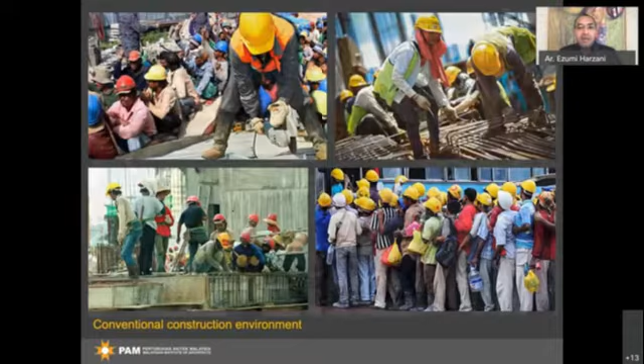This is just a comparison of how the conventional construction ecosystem works - this is what we employ in most construction projects. This analysis by McKinsey shows a comparison of 4 different projects where it's not coordinated, because with 4 different projects and different clients, everything has been done sequentially from development, design, engineering, up to supply of material, components, storage, logistics, construction time, and delivery of the building system. If you notice, there is no interrelation and coordination between different projects - everything was actually planned in silo.

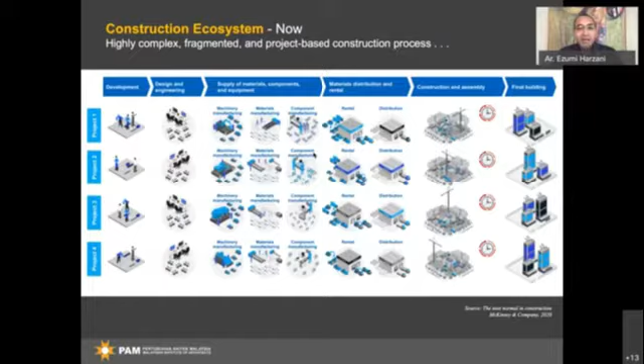But with new technology, the new construction ecosystem we expect in the near future is one where we need to use more modular systems, more standardization, and integration in terms of building components. And this is how it should be - several or many projects coordinated, especially when delivering the building components.

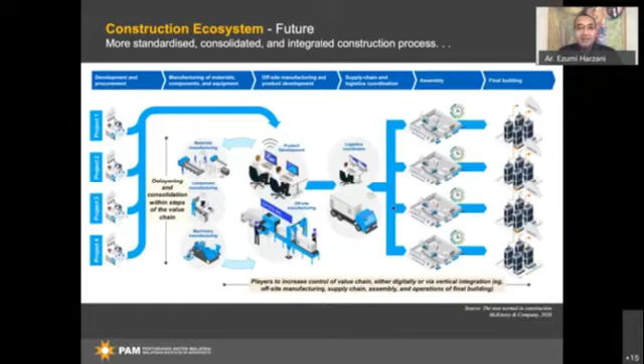Talking about modular systems and IBS systems, the design process can be done earlier. Building components can be prefabricated for various projects, which reduces the amount of activities required at site. Most of the activity will be done in a controlled environment in the factory, and then what we need is coordination for logistics and assembling the components to deliver the building. So this is in terms of construction.

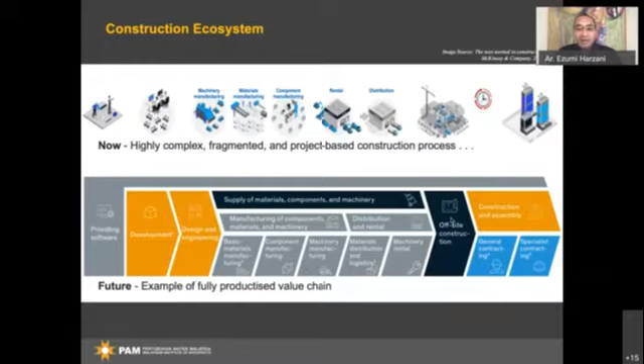The activities in the new ecosystem can be wider - not just the building component and construction at site itself, but may include providing software, system development, design development, engineering, fabrication, research on the building component, installation, coordination - until at the end, the actual construction and assembly is just a small part of the whole delivery process. So the earlier part can be done off-site, including the prefabrication program at the factory. This is the new shift already happening, but very slowly. I think this pandemic may accelerate the whole change.

Talking about construction, what about buildings and built environment? With new technology, with IBS and modular systems, Hong Kong recently completed the first project they call MIC - Modular Integrated Construction. I think that will accelerate the future construction process, so we don't need to spend 3-4 years on a construction site. China has shown some examples - hospitals can be built in just a matter of weeks. And with that, it actually accelerates the growth of construction and land development.

Talking about building and sustainability, the first impression when we talk about sustainability is green. So the earlier part of advocating green building always has this reflection that green building has to be green, or you need to have vertical planting, a vertical feature wall with green. This was the earlier part where people needed to be educated, but not just that. Today, I think the awareness of green building is wider - people start to understand it's not just about planting plants on the wall or the feature wall, but it is more than that. And this is our own project.

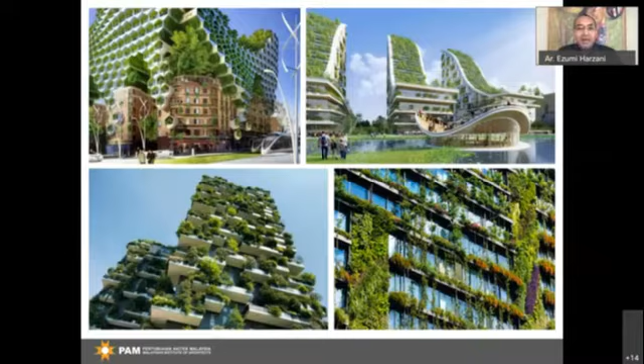This is our project, next to KLCC, Le Nouvel Tower. This is the project that we coordinated with Jean Nouvel from France. This is one of our earlier approaches to express what green building is. I cannot say whether it's successful or not, it depends on public acceptance. Some people say you don't need to put plants on the wall to tell people this is green building. But this is the earlier part of how we can educate the general public that there are many things that are possible, many things that can be done.

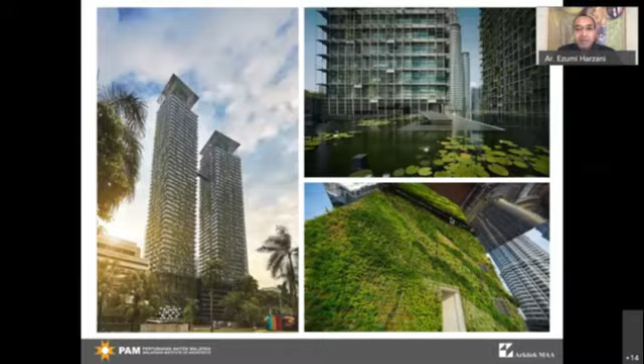There's so much to talk about green building. As PAM president, I think I should also talk about the Green Building Index. I'm not going to talk in detail, just to relate it with the awareness of sustainability and green building design. GBI, Green Building Index, was launched in 2009.

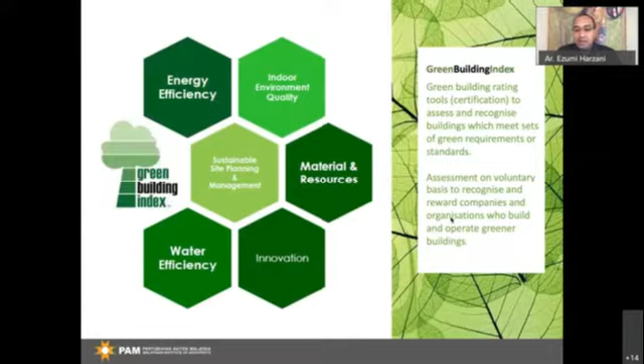After 10 years, we started to measure the success of these tools. This initiative started jointly with PAM and the Association of Consulting Engineers in Malaysia. We measure certain elements or components of sustainable elements in building construction and development, including energy efficiency, indoor environment quality, material and resources, innovation in development, water efficiency, and sustainable site planning as well.

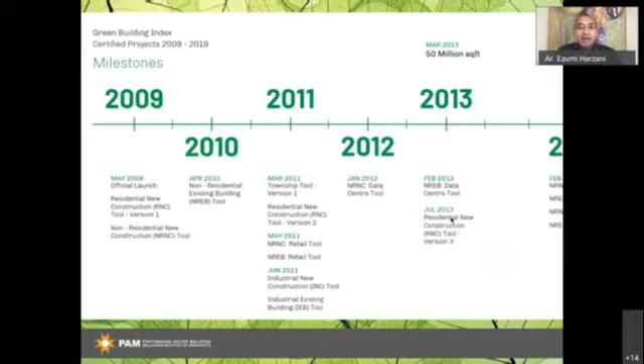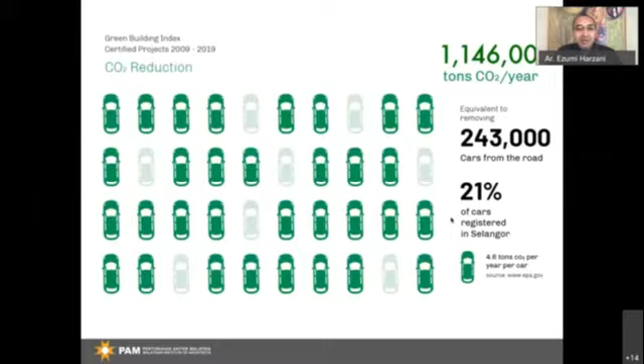This is the diagram in terms of reduction of carbon emission. You can find all these details. PAM published this book, Greening Malaysia, in 2019, so more details are available from that publication. The reduction in carbon dioxide is equivalent to removing 243,000 cars from the road. The effort we have done so far is still not satisfying to us; we stay putting more effort into achieving more reduction in terms of carbon production.

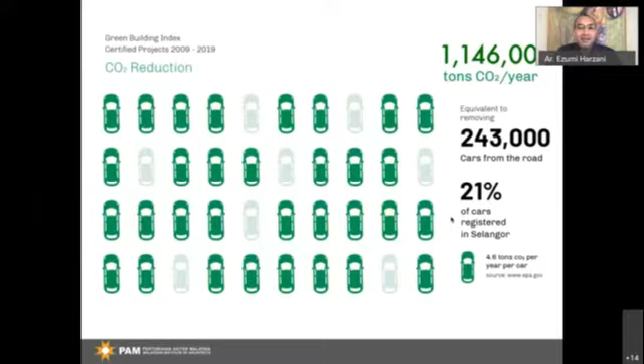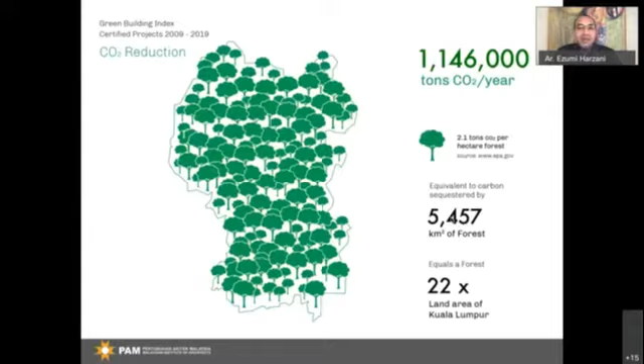This number is equivalent to a 21% reduction in terms of number of cars in the state of Selangor. We did this comparison or analogy so it's easier for the public to understand the benefits. The same carbon reduction can also be translated into greening 22 times of Kuala Lumpur, which covers about 5,457 square kilometers of forest. So we talk about green sustainability, and the key issue for sustainable built environment lies in the planning activities.

We know that all over the world people try to develop land, and in some other parts of the world, due to scarcity of land, they start going into the waters, reclaiming land. Even in our country, in Malaysia, there are some reclamation projects. In fact we have done reclamation projects in Sandakan, Sabah, and even other states, including Penang, are quite active in reclamation projects.

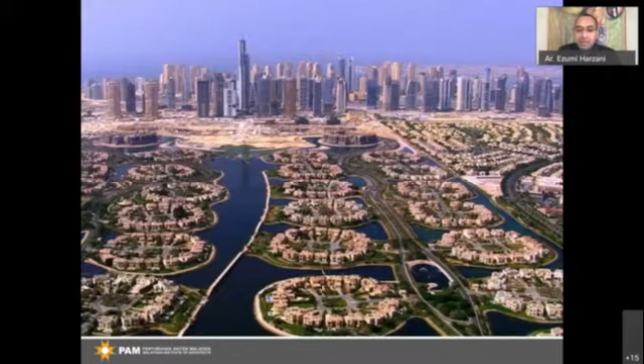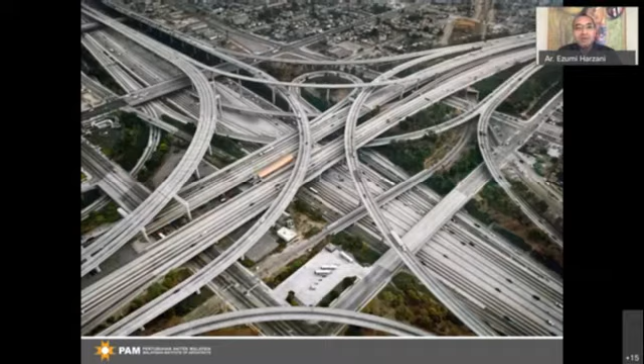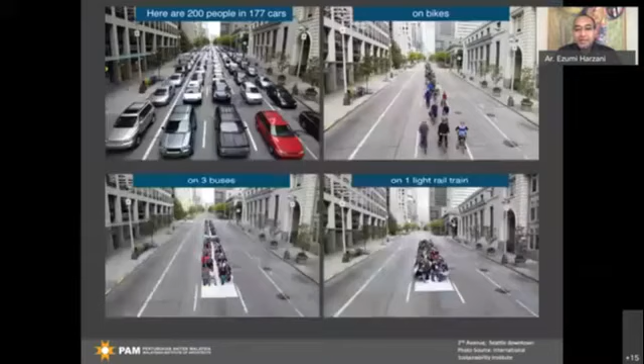Unfortunately, most of the time the planning for development is vehicular oriented, not so much people oriented. Most of the time the major planning grids are planned based on traffic or vehicular movement. This is what happens when priority is given to vehicular movement: you see multiple layers of motor vehicle networks. This is what we see today — more development, more roads, more cars, and you need more buildings for cars, but still you cannot resolve the traffic issues. This was a study done by the International Sustainability Institute.

They tried to make a comparison of how 200 people occupying 177 cars occupy almost 5,000 square meters of space statically, without moving. But if people ride bicycles, the same 200 people on 200 bicycles only occupy 720 square meters, which is only 1/7 of the space required to provide the facility for cars.

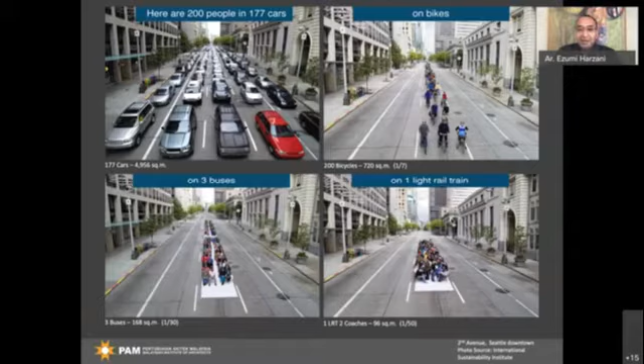I mean the space on the road. And if the public uses buses, for 200 people, 3 buses are required, then it's only 168 square meters. And if public uses LRT with 2 coaches for 200 people, it's only 96 square meters. So it shows that using public transport can reduce the space from 5,000 to only 96 square meters, reducing the space for infrastructure for the vehicular network by 50 times if we use public transport, especially the rail system.

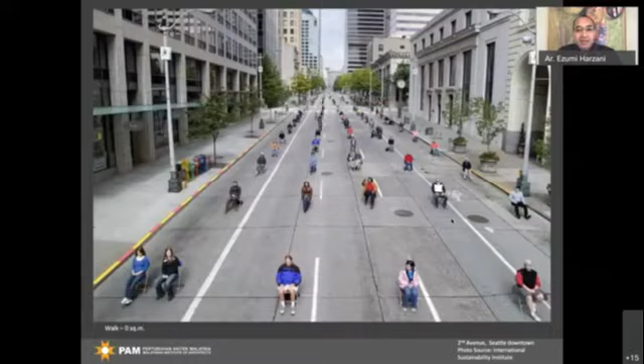But this is just an analogy. This is not social or physical distancing due to the pandemic. This is the analogy to show how people are separated when they sit in the car, and you can see there is more space if we put away the cars.

The issue is that with the current pandemic, this is now restricted. We cannot have social gathering in tight spaces. We cannot have events like the one I showed just now. So under the current situation, we are prohibited from doing such gatherings. So how are we going to live with coronavirus?

Living with coronavirus is actually not something new. We have been living with coronavirus for many decades. From the statistics, human beings have been living with various pandemics before, including, among the bigger and earlier ones, the Plague of Justinian with a death toll of 30 to 50 million people, the bubonic plague with 200 million deaths, and smallpox in the 16th century with 56 million deaths.

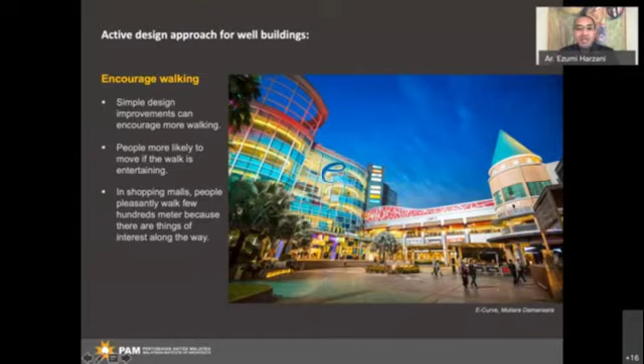Simple design improvement can encourage more walking. People like to move, and if the walking is entertaining, we need to provide an environment that encourages people to walk. So these are some examples of why two different buildings are being connected through a link bridge, to encourage people to walk and travel, and for fire access.

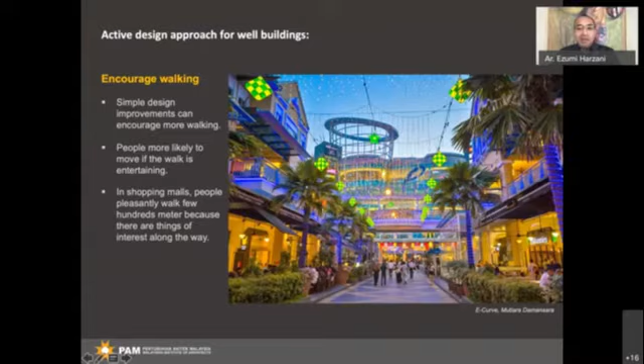This is our project in the E-Curve. Actually, this is the fire emergency access, but we transform it into a pedestrian route. Of course, during emergency, it still can be used as fire access.

And the staircase design, for example, is meant to encourage people to use the staircase rather than the lift. But if the staircase is hidden or enclosed, sometimes people are reluctant, or maybe they don't feel secure using the staircase.

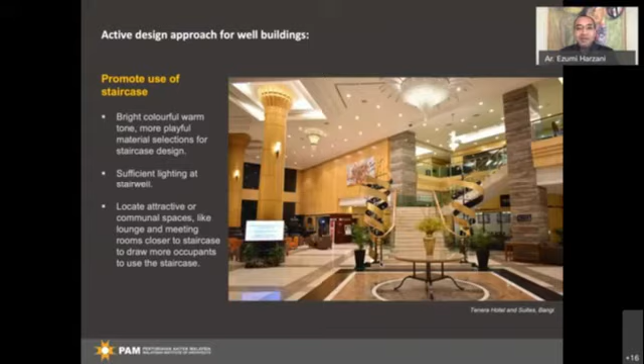And we need to provide more breakout spaces so that people can live happily. A change of pace in the working environment helps increase productivity as well.

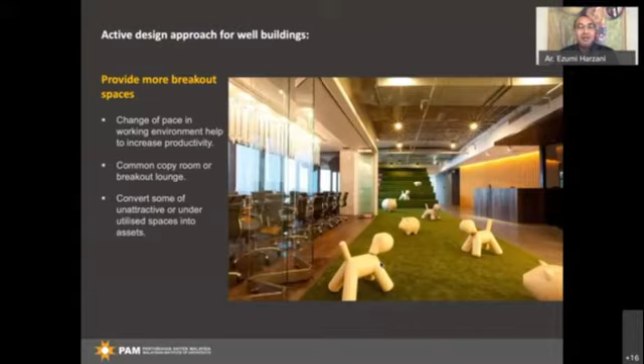I have a few slides on this, but I think I do not have much time, so I have to skip some of these. Facilitate access to green space—maybe it's good to have green terraces.

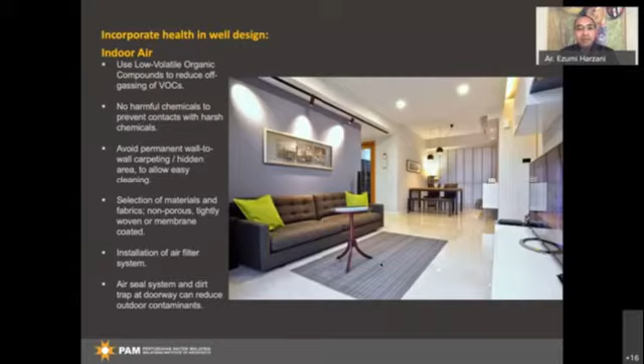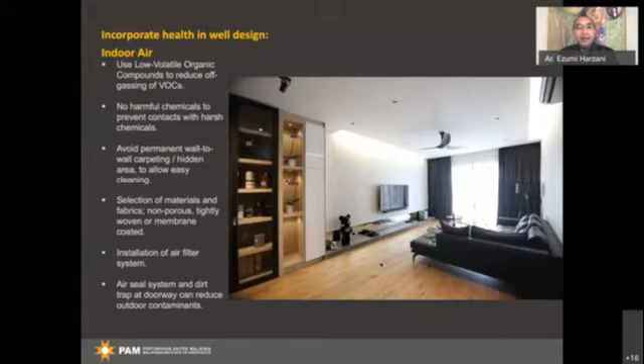Indoor air quality—now with technology, we can improve it using certain types of filters. Even the selection of material helps reduce VOC gases, and this is among the issues that affect indoor air quality.

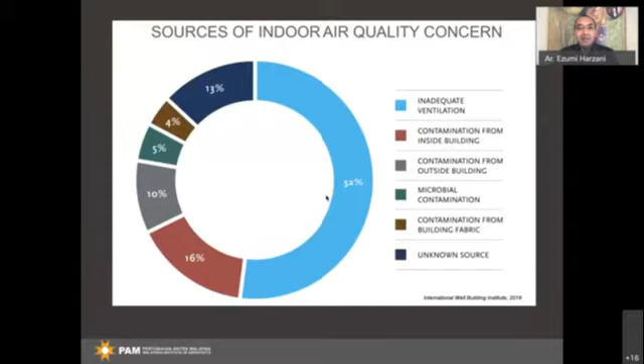One of the major issues, which is 50% according to research, is actually inadequate ventilation. So natural ventilation and indoor air mixing is very important. We should not rely 100% on indoor mechanical ventilation systems.

And to encourage people to drink water. And light, of course, plays a very important role in the production of our hormones, and different light gives different impact. So we have to understand the color tone that we are going to use.

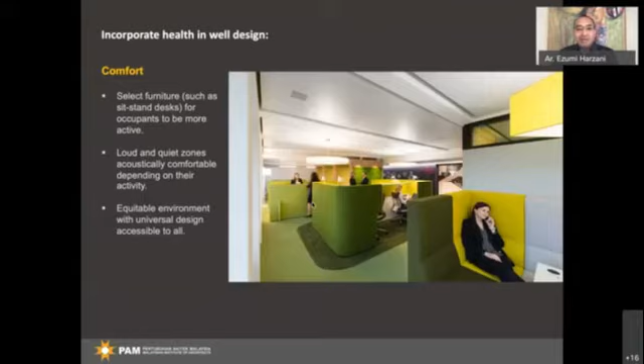And comfort, of course—sometimes we sit 8 to 10 hours a day. Many offices now start to provide standing desks so people can work while standing, and selection of furniture to make sure it's comfortable. So these are among the elements that can be incorporated into the building.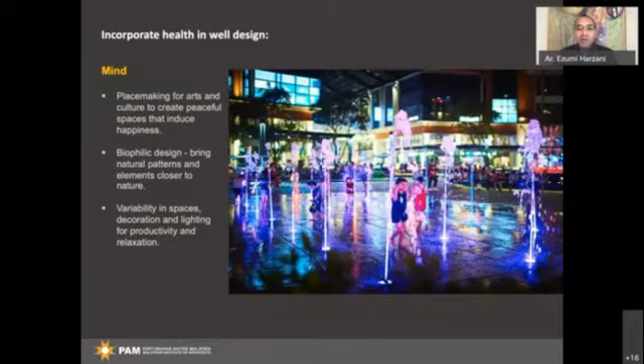In this example, it may not be possible today due to the pandemic, but we hope one day we can still enjoy such a facility or placemaking like that.

So at the end, this is my last slide. Whatever technology or development concept we have, we must remember that we still live within nature. If we do not preserve the resources or respect our nature, the nature will start to claim back their territory.

I remember during the early part of the COVID pandemic, some Western countries, and also Japan, saw animals start to occupy the city and come onto the roads. So I think we must respect nature.

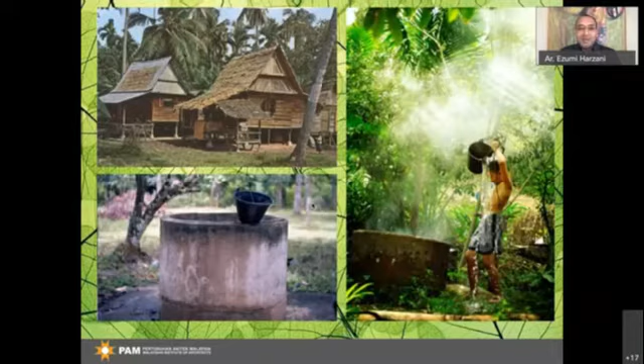So that's my view for the moment. Thank you very much.

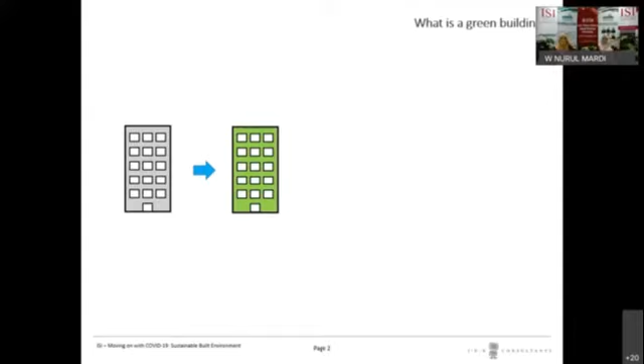Firstly, I would like to start off with how I would define a green building. I think we get asked a lot as green building consultants, especially from people not from the construction background, what exactly do we do? And of course, the next question is, what is a green building? This definition differs from person to person or from organization to organization.

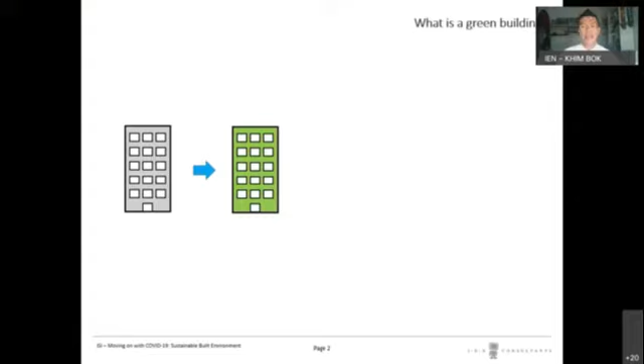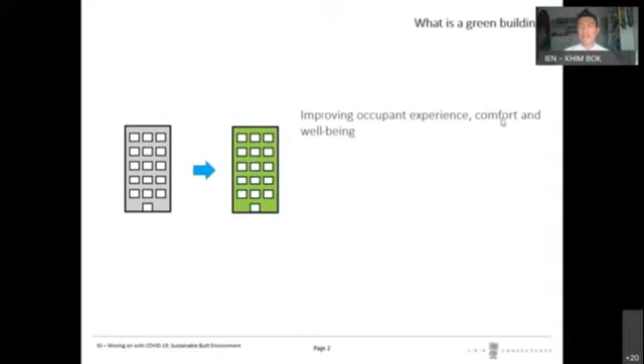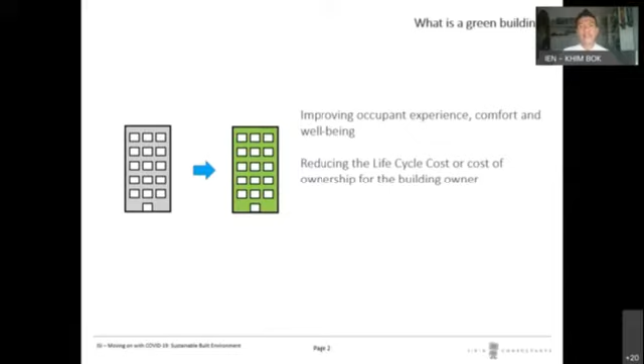But this is how I have so far tried to explain it. Firstly, it's a building which seeks to improve the occupant experience and well-being. It seeks to reduce the life cycle costs and cost of ownership to the building owner, and it seeks to reduce the negative impact of the building on the environment, both during construction and during operation.

So there's a triple bottom line here. You want to focus on the final end user, the occupants. You want to be able to address issues concerning the building owner, and of course, finally, equally important, you also don't want to neglect the environment.

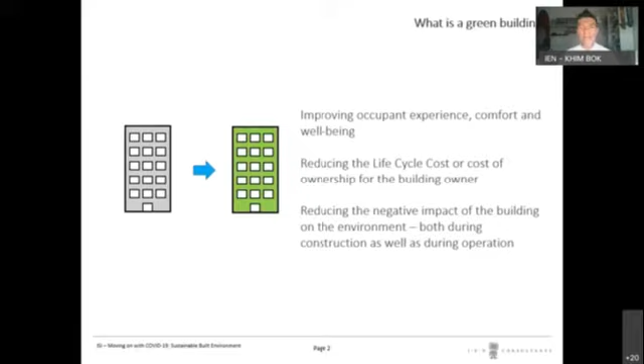This has somewhat been covered by Ar. Ezumi just now, but I will run through this as well. How has COVID changed the way we use buildings? Firstly, as we are all experiencing, because of social distancing, there's a lot lower occupancy in buildings. Buildings designed for higher occupancy are now seeing only maybe half the occupancy, especially offices which are still implementing alternate work weeks, for example.

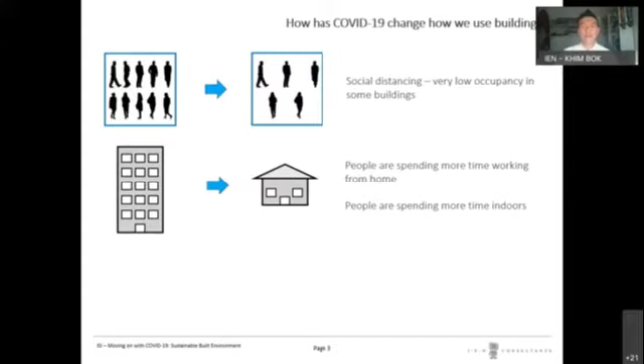Secondly, people are spending more time working from home, like I am here today taking this webinar from home. Additionally, they are also spending more time indoors because of the earlier restrictions. Now, in Malaysia, we're allowed to move about a bit more freely in the country, so that's good. But generally, I think most of us, due to concerns, are still spending a bit more time indoors.

And thirdly, face-to-face meetings are being replaced with video conferences and webinars. So people are having to take these calls in the privacy of offices or at home rather than grouping together in the office.

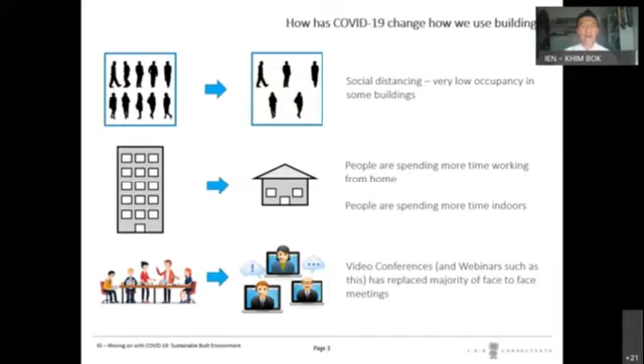So firstly, what are the strategies that I'm proposing we should do to allow buildings to adapt? Firstly, we really need to look at better air quality. I think this follows through very well from Ar. Ezumi's earlier presentation about air quality. In fact, the Guardian newspaper recently published an article about how indoor carbon dioxide levels could be a health hazard to us.

An excerpt from that article says that in a study of 24 employees, cognitive scores were 50% lower when participants were exposed to 1,400 ppm of CO2, compared with those exposed to 550 ppm during a working day. Since most of us spend at least 8 hours a day in the office, this is a very serious concern. What I'll do is present some numbers from measurements we've done in some of the projects we've been involved in.

This first measurement is of CO2 levels taken at an office space that has sufficient ventilation. When I say sufficient, I mean it meets the recommended levels in ASHRAE 62.1 as well as the local codes and bylaws.

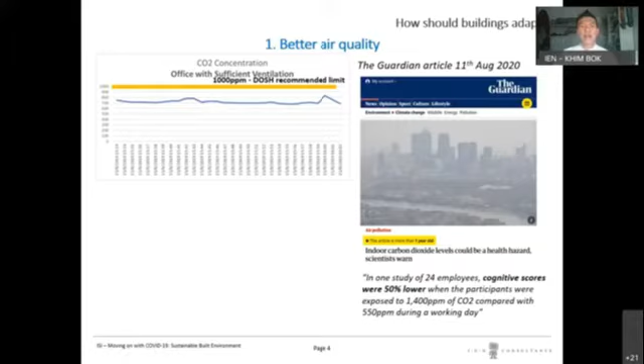I mean, of course, not as low as 550, but well below 1,000 ppm, so this would be a safe and healthy exposure. Now, if we look at another measurement, actually this is from exactly the same development, but this particular office, due to the design of the mechanical air conditioning system, uses split units and therefore doesn't have a dedicated outdoor air supply, so it's insufficiently ventilated. I'll show you next what level it achieves.

So now, the DOSH recommended level once again is 1,000, and the recorded levels, recorded around 11 a.m. up to just 12 p.m., over just 1 hour on a work day, go from 1,400 up to 1,550. So that's way above the recommended limit for long-term exposure.

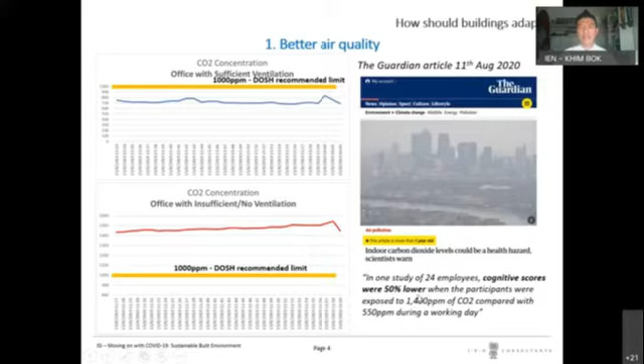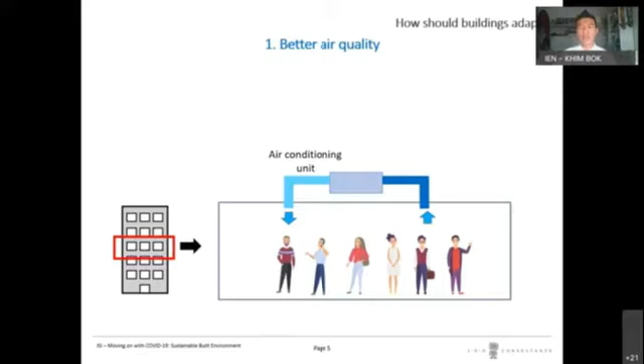This goes to my point about sufficient ventilation, where rather than a purely recirculating air conditioning system that we have in a lot of buildings, especially those using split air conditioners, as well as homes -- actually, most homes, in fact, the majority use split air conditioners -- we need to firstly ensure there is sufficient outdoor air that is pre-treated so that you have humidity control. Next, as an additional tier, we should consider introducing some sort of filtration.

One interesting note here is that outdoor air in earlier air conditioning and ventilation guides used to be called fresh air, because outdoor air used to be assumed to be fresh. But over time, they changed that terminology to call it outdoor air, since you can no longer guarantee that outdoor air is fresh. So this is where some form of filtration would be important.

One option would be to provide a MERV 13 or higher rated filter purely on the outdoor air intake. This would also help address issues regarding haze. Malaysia has two seasons, hot and raining, and the other being a haze season, so this would help buildings adapt to the issue of haze as well.

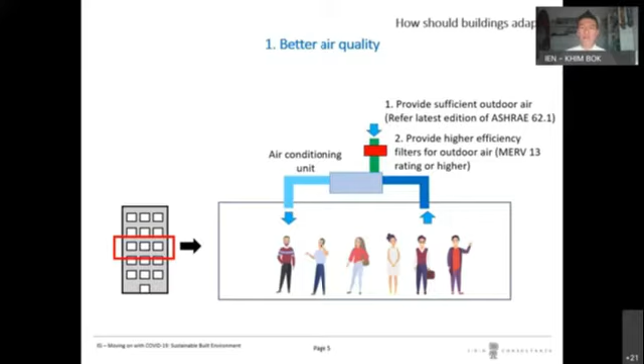Thirdly, this addresses more recent concerns to do with Covid-19, as well as issues related to sick building syndrome, which is to employ some sort of sterilization system into the air conditioner. One option being promoted now is the ultraviolet germicidal irradiation system. This technology has been used quite commonly at hospitals, where air quality and sterilization is more crucial. But with growing concerns of air quality in offices, we are also seeing this considered for non-residential, retail, or commercial type environments.

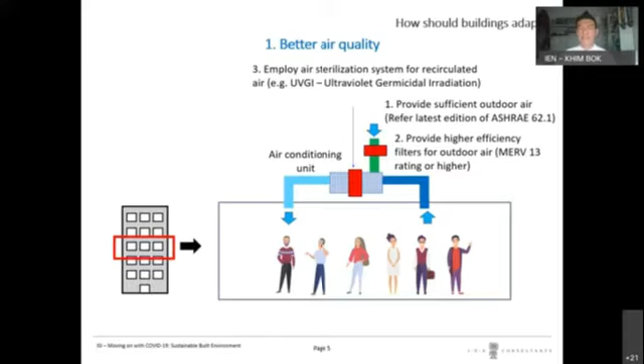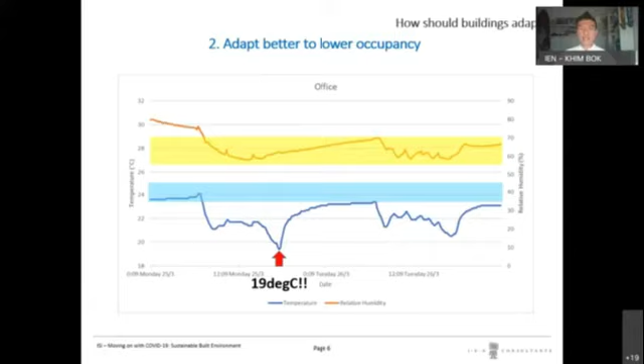So what's happening? Engineers design for possibly 10 meters square per person, and design for 24 to 25 degrees Celsius. What's actually happening when the building operates, and this is before COVID, could be 20 meters square per person. People are out for meetings, having internal meetings, some are on MC, or spaces are designed with larger workstations and larger rooms for senior staff, resulting in lower occupancy count for the entire floor. So that's already fewer people.

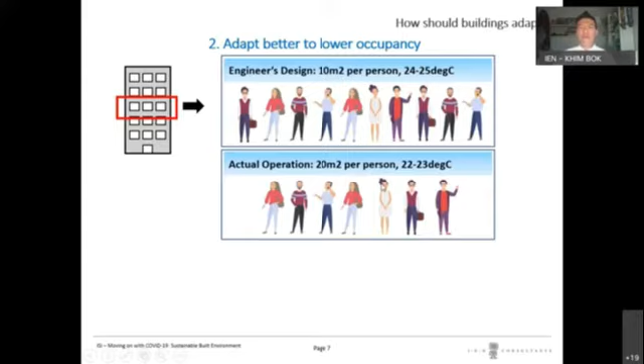Then with COVID-19 SOP, you see even lower occupancies—we're looking at up to 30 meters square per person or even more. This means that the system fails to adapt. It isn't capable of adapting to very low occupancy and usage.

Even at its lowest setting, it's still going to cool the space down to way below what is deemed comfortable. So then you have people wearing jackets, people complaining that it's too chilly, and people who are more sensitive may fall sick. This becomes an issue with more people getting ill, as well as higher energy costs, or unnecessarily high energy costs, for the building owner.

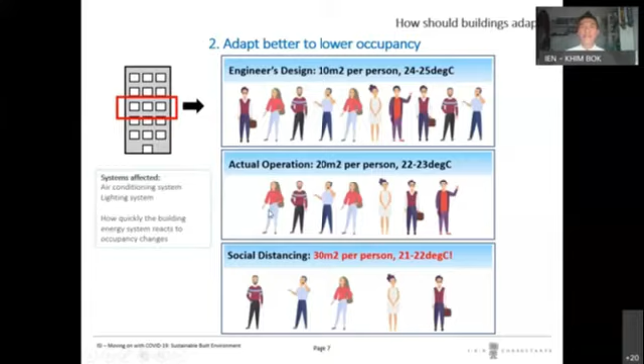Next, we're looking at balancing privacy versus the need for interaction and promoting interaction. In our projects, we have issued occupant comfort surveys where we ask the end users, the occupants, the staffing, what they think of the building in terms of temperature, lighting, and noise as well.

One of the key concerns we have is with noise. We ask them what the key sources of their noise discomfort are. This isn't unique to this particular survey—we see this in quite a few of our projects already, that the top three complaints we're seeing frequently are people saying they are disturbed by other people's conversations, noises from other work activities, and people overhearing their private conversations.

This is of course before COVID, before we were doing a lot more video conferencing on our computers, before we were taking more calls as well. And people were already complaining that these were sources of interruption to their workday.

What's basically happened is we have taken a traditional office design, which was very partitioned up. This was common up to the late 80s, early 90s, where everyone had a cubicle for their own privacy so they could work as privately as possible, without seeing or being so disturbed by what happens around them. But the disadvantage of this was there was little interaction between colleagues—for example, this person here would find it very difficult to have a quick question or chat with his neighbor right across. So subsequently, we moved on to a very open office system.

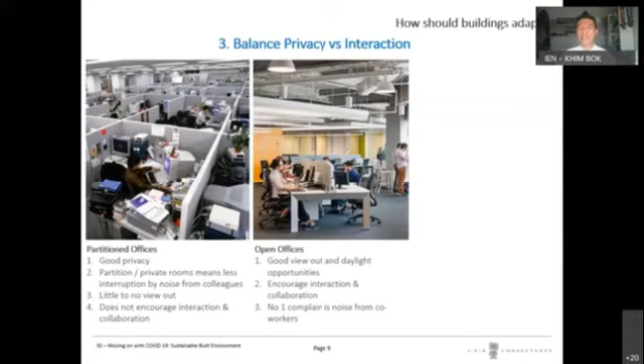What we're seeing is a good compromise where open offices are taking advantage of both private office and open office scenarios by creating more pods or call booths. As and when necessary, someone uses these to either make conference calls, have quick discussions of two persons, or just take personal calls. This way, you don't disturb other people, and other people's conversations don't interrupt you either. Because these are small and can be placed around the office, they also don't block as much of the view out for people inside, compared to the arrangement on the left.

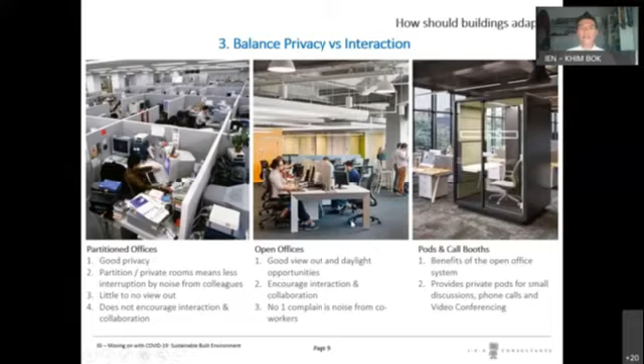Finally, this is my last point: we need to give occupants more control. What I mean is, in a lot of projects, if you look for the air conditioning thermostat that measures the temperature of the space, you'll find it's located on the ceiling and not reachable. It's out of reach of the occupant, so they have no control over the temperature. The most they can do is complain to the facility managers and hope the change happens fast enough. The problem is, because of our current trend of very glazed buildings with a lot of facade, the temperature you feel is so dependent on how bright or sunny it is outside.

It changes very quickly, every hour. So if I'm sitting at the perimeter, I may be complaining it's cold one moment, but the moment the cloud moves away and it's sunny, I may then find it's warm. I can't keep repeating this process of calling the facility managers. Well, I can, but he won't have time to keep changing it for 1,000 occupants in the building.

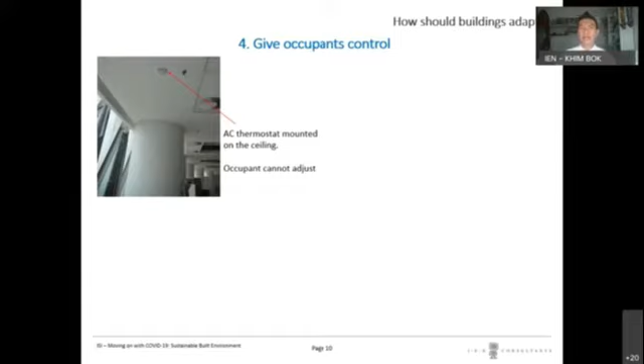So what can be done is providing localized control, moving that controller down to an accessible level, letting occupants decide the temperature they want. Of course, in the interest of maintaining good energy efficiency, we can put a recommended set point. In fact, a lot of building systems allow a pre-programmed minimum temperature. So even if the occupant tries to change the thermostat to, say, 21 degrees, the system will ignore that command and maintain a minimum of maybe 22 or 23. This way we can give control while avoiding overcooling.

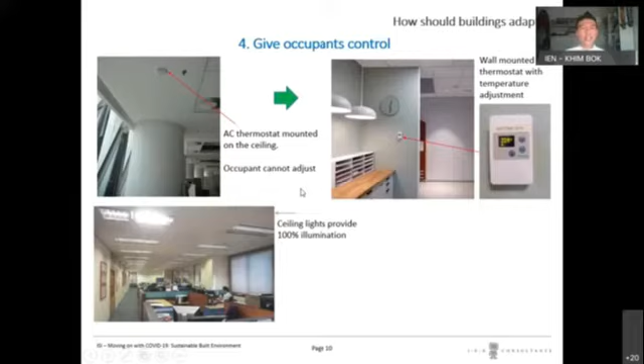The same goes for lighting. Rather than ceiling lights providing 100% of illumination fixed throughout the space, we can move toward a system that balances daylight, task light, and ceiling light. The ceiling lights are now designed just for background illumination, for circulation and moving about, not for the tasks people need to perform at their desk. For background illumination you may need 200 lux, so the ceiling lights provide that. For reviewing drawings or working on a computer you need 300 to 500 lux, which can be achieved by personal task light.

This is localized — you get much brighter lighting with your own personal control as and when you want it. This also allows, as shown in this image, generous view out and daylight. Of course we also have to be cautious about daylight, as there are concerns of glare. So in our study and optimization, we always look at how to bring in what we call usable daylight, which is comfortable diffuse lighting.

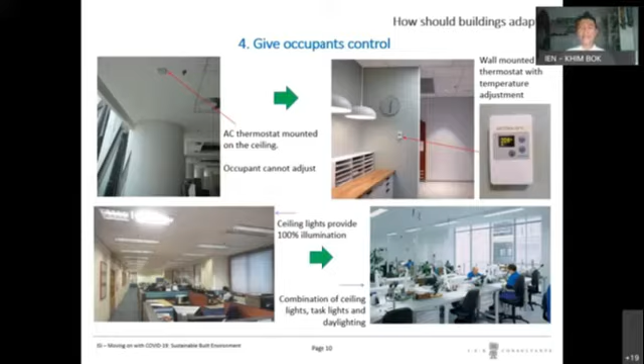Okay, so that concludes my points.

All right, thank you, IR Khim. It's a very good sharing from you.

Moving on with COVID-19, we can see that the Green Building Index is already there to ensure that our indoor spaces, the occupant experience and well-being within indoor buildings, are secured and of high quality. However, the balance is we need to ensure privacy versus interaction, and efficient use of space. Right now, from having like 10 people in a space, with COVID-19 and social distancing we need to move to a larger space to ensure the SOP is adapted.

And I have a few questions for you, but I think I'll just pose one question first. So, in your opinion, with all the changes that we need to adapt to, do you suggest there is a need to revise our current policy?

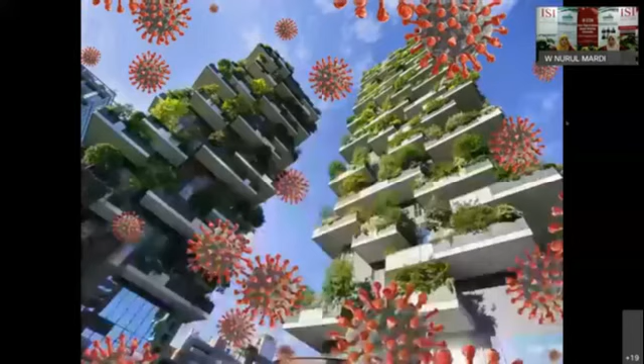Based on this, when we look at how we embrace new norms while working together with stakeholders to fight against the adverse effects of COVID-19, we see the sustainable built environment as perceived by GCCRG from the perspective of the construction industry. I was happy earlier when Dato' Azumi was talking a lot about the construction industry being the biggest ecosystem of the built environment.

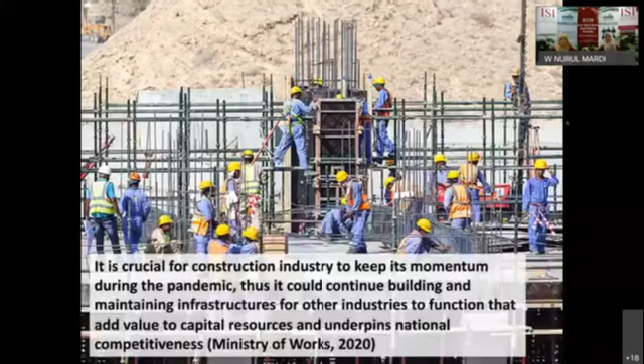Thank you, Dato'. So at least I don't have to explain how this construction industry places themselves in the built environment. So when Dato' talked about the sustainable built environment just now, he very much linked it to the green. But from the perspective of our topic today, the GCCRG's perspective, this sustainable built environment is very much linked to how the construction industry can be resilient.

Go back to Dr. Yasmin's talk just now, how resilient we are, how resilient the industry is to keep our momentum during this outbreak, so that we could continue building and maintaining infrastructure, especially crucial infrastructure like hospitals, for other industries to function, which eventually would add value to the capital resources and national competitiveness.

So what are the challenges ahead? This was the question posed to me by Dr. Nurul early this week, a very last minute notice from ISI. So what are the challenges despite this COVID-19 pandemic in managing our construction industry stakeholders?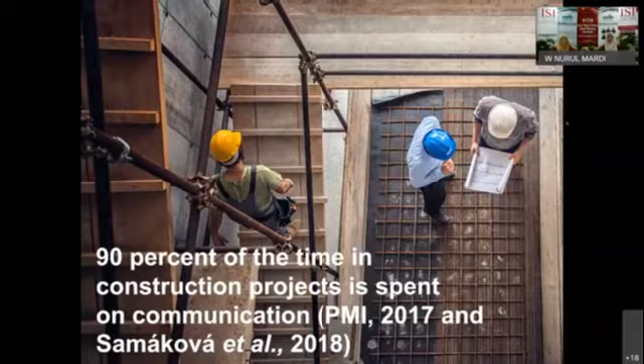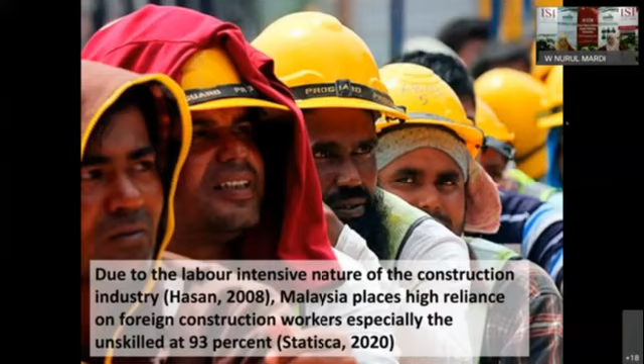Based on the fact that 90% of construction activities actually involve communication, be it verbal, oral, direct, face-to-face, and based on the statistic I showed about how dependent we are on foreign construction workers, especially the unskilled at 93%, where dominantly they consist of Indonesians and Bangladeshis and others, as shown in the slide, quoted from the CIDB and CREAM in 2019.

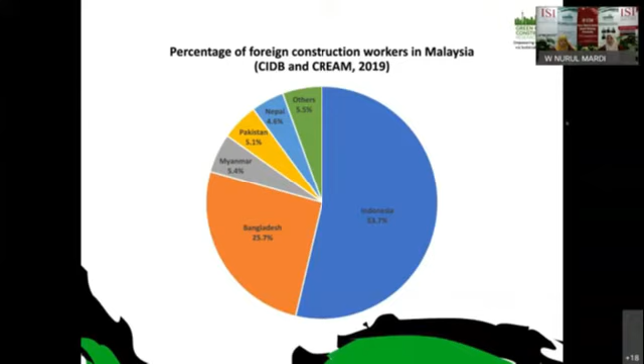This diversity of different nationalities, different mother tongues, and even culture has caused communication breakdown, communication problems amongst these foreign workers, as well as between the managerial officials and the foreign construction workers themselves. This has eventually led, evidently, to only a very minimal number of construction sites complying with the SOP.

Especially during the movement control order in May to June, this was claimed by the Senior Minister of Infrastructure Cluster, also the Minister of Works, saying that only 9% of the contractors in Malaysia complied with this SOP.

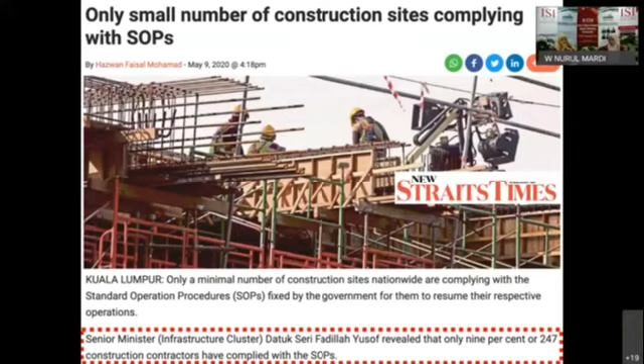And when I was listening, the talk by IR Kim just now really opened my eyes, when he talked about occupancy, balance, privacy and interaction. Unfortunately, for our construction industry, especially in terms of our kongsi and construction labor quarters, these are not applicable at the moment.

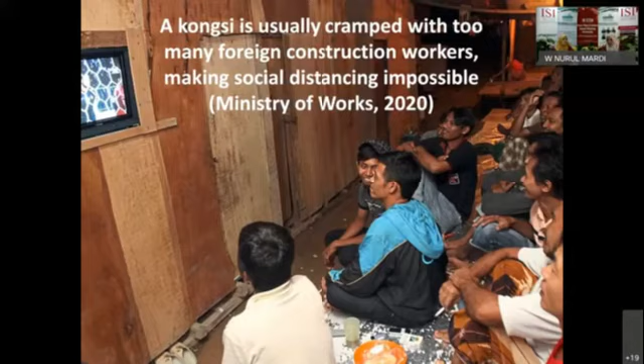As we know, kongsi is usually cramped, overcrowded with too many construction workers, so it's very impossible to ensure that social distancing is being implemented effectively. So lower occupancy, balanced privacy and interaction is a big no-no currently, which eventually becomes a challenge to the construction industry in managing our stakeholders throughout the pandemic.

And we can see in the CLQ - CLQ is the centralized labor quarters, gazetted in 2018 by the Ministry of Works - these foreign construction workers are currently living in this packed CLQ with their originally accustomed lifestyle. The way they eat, their daily activities, are accustomed to their own culture back in their country. This has eventually increased the potential spread of coronavirus in Malaysia.

You can see it is evident when there are many emergences of new construction site clusters in Malaysia, which, amongst all, is caused by construction workers who escaped during the COVID-19 swab tests. So why do they escape? One of the reasons is anxiety, fear, especially amongst the illegal ones.

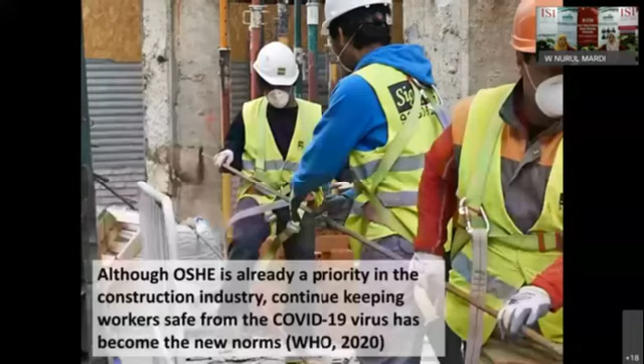Thank you, Dr. Nurul. So back to the second question: how do we solve the challenges? How do we embrace the new norms amongst our stakeholders? We know that it's already been acknowledged that OSHE, occupational safety, health, environment practices have been in place in the construction industry.

However, due to this COVID-19 pandemic, we need to ensure the sustainability of our workers in terms of their well-being, in terms of their health, is being safeguarded. So these practices have become the new norms in the construction industry.

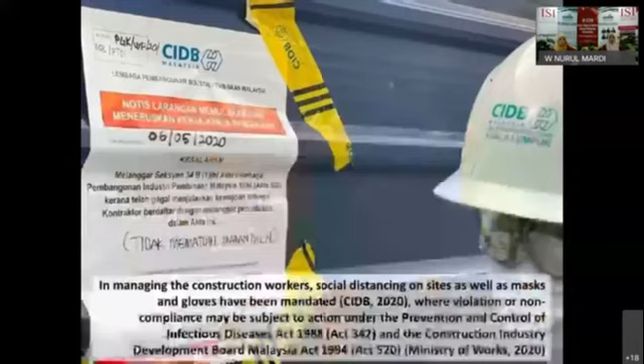Can we change a little bit because I can't see the slide. Okay, thank you.

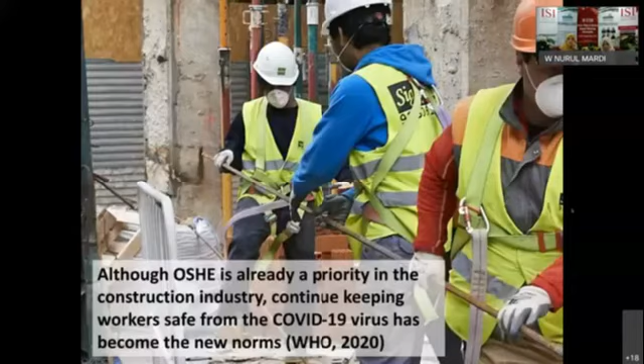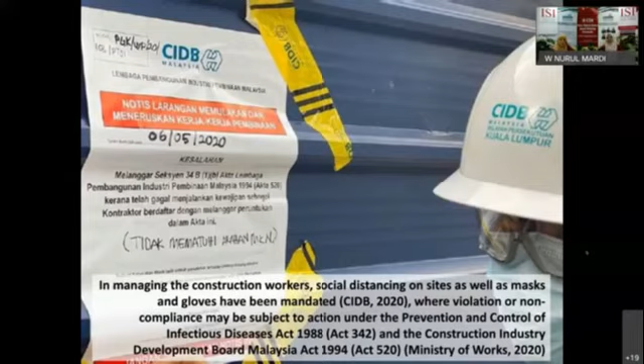So a part of the efforts has been mandated by the CIDB recently, where they have mandated social distancing on sites as well as PPE - personal protective equipment - complying with WHO standards as well as CIDB, Ministry of Health, and Ministry of Works. SOPs have been mandated, where non-compliance may be subject to legal action under Act 342 as well as Act 520.

On top of that, various OHS procedures have also been put in place, including sanitary protocols. All of this is being implemented both at the sites as well as the CLQ, or kongsi - proper hygiene, toolbox talks, especially regarding the newly announced COVID-19 SOPs, the system for tracking the health and well-being of workers, the swab testing that ideally should be taken on a fortnightly basis, as well as prompt reporting on health issues related to COVID-19, especially for stakeholders within the site and the CLQ itself.

So these are amongst the new norms being implemented, where video conferences and teleconferences are now being acknowledged. Previously, this was not part of the communication management tool under the Project Management Institute, but now it's established as one of the new norms to be included in project management tools.

The same goes for IoT - we have to acknowledge that the construction industry is extremely slow to adapt and adopt IoT infrastructure, due to the 90% face-to-face communication I was talking about earlier. So we acknowledge we are quite slow in adoption. However, throughout COVID-19, we have to embrace this new norm to see the growing role of IoT in our daily lives and construction site activities.

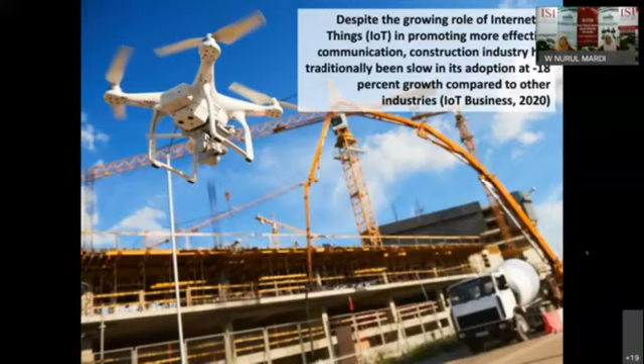And work from home - everybody loves to work from home, at least for me. So these hybrid working conditions are expected to become part of the new norm in the construction industry, to help manage our stakeholders in preventing further spread of coronavirus. So even though traditionally we need a physical presence on site for construction, we are looking at new methods.

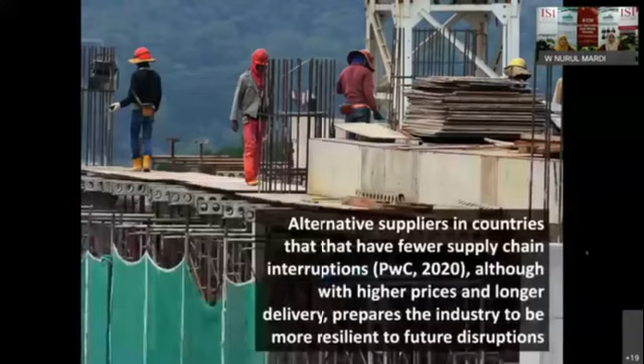These are among the studies that could be done by the industry working together with universities, on models that are suitable and apt to implement in the Malaysian construction industry, that allow and promote hybrid working conditions. And based on the fact that much of our supply chain has been interrupted due to COVID-19, especially since our material supplies are mainly from China, we could look for alternative suppliers from countries less impacted by COVID-19.

This again comes back to the resiliency of the construction industry. It would prepare the industry to be more resilient to future disruptions, for instance, future pandemics or lockdowns.

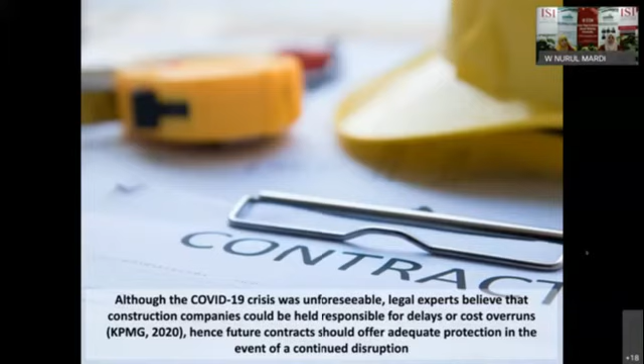And finally, in terms of contracts - this is a very interesting topic which you can also expand, especially for contractors. We should probably provide legal shields, specifically in the contract with specific clauses, so that the contract could offer protection in the event of continued disruptions. Because currently, many legal companies or legal associations believe that construction companies, particularly contractors, could be held responsible for delays or cost overruns that we have faced throughout this COVID-19 pandemic.

So going back to the first question: What are the challenges? What are the solutions? Why do we need to do this? Why do we need to manage our stakeholders amidst the COVID-19 pandemic? We have this construction industry transformation plan to prepare the industry toward becoming a highly productive sector, at least in Malaysia. These actions need to be undertaken mutually so that we can direct ourselves toward achieving the sustainable development goals. So basically, when looking at the challenges and solutions, we are looking at these four perspectives.

First, these solutions are meant to promote, or at least safeguard, the good health and well-being of construction workers, especially the underrepresented foreign workers, to promote decent work and economic growth, while continuously providing employability, and to provide infrastructure, especially critical infrastructure for other industries, eventually working toward the achievement of sustainable cities and communities in Malaysia. With that, I thank you on behalf of Green Cities and Construction Research Group.

Thank you. Okay, thank you, Dr. Shuhaida. That is quite an eye-opener for me, looking from the construction point of view and also managing the stakeholders. Well, I have one question that has been shared with me - you talked about contractors.